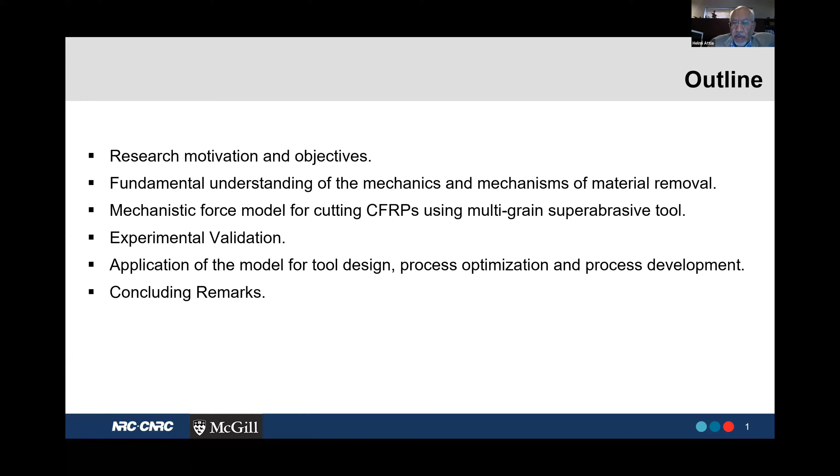As you know, the aerospace industry is quite an important sector. For example, if you look at last year or two, the contribution of that sector to the aerospace and defense industry worldwide was in the neighborhood of $760 to $800 billion a year. So it's quite significant.

When you look at the use of composite materials in aerospace, it's growing very steadily. At the moment, if you look at some of the aerospace structures by Boeing or Airbus, for example, you find that the percentage of using composite material is almost around 50% or more.

The drilling operation is very critical. Some of the structures you can have to make up to 55,000 holes in one aircraft, for example. There are some issues here.

There is the economics of the process. Also, there is the quality attributes of the product. And more important, you have to make sure that you are getting a damage-free structure.

When I talk about damage, there are many types of damage. The most critical ones are the delamination of the plies of the composite, or thermal damage. These two are the most critical ones, and they can be controlled.

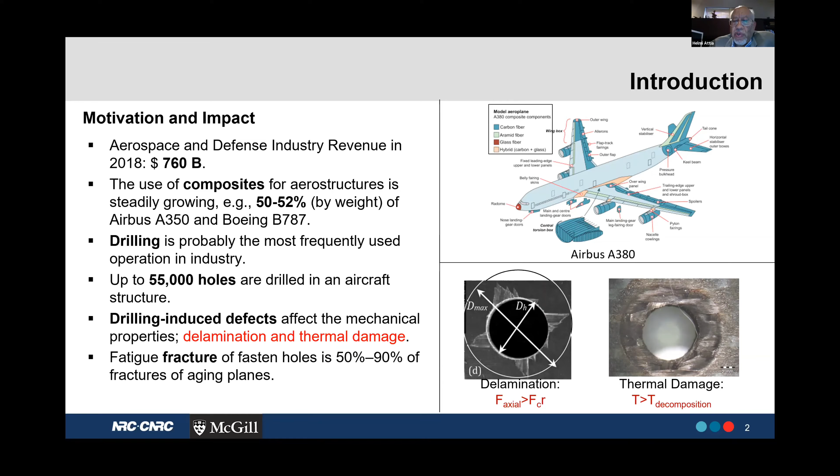So it is critical that we have to make sure that we are controlling the process. If you look at how to control the process, you can see that I have to reduce forces and reduce the temperature.

The conventional way of drilling, as you know, is that you have a tool which is advancing axially, a continuous cutting process. But the best way to reduce the forces and temperature is to make it intermittent. That means using some kind of vibration-assisted drilling or orbital motion, so that the tool and workpiece are not cutting continuously.

By imposing these two types of movement, you can eliminate the dwell at the center. Like in conventional drilling, the center of the drill is at zero velocity, and that increases the forces. So by imposing some kind of velocity vector at the center through vibration-assisted drilling or orbital drilling, you are reducing the forces this way.

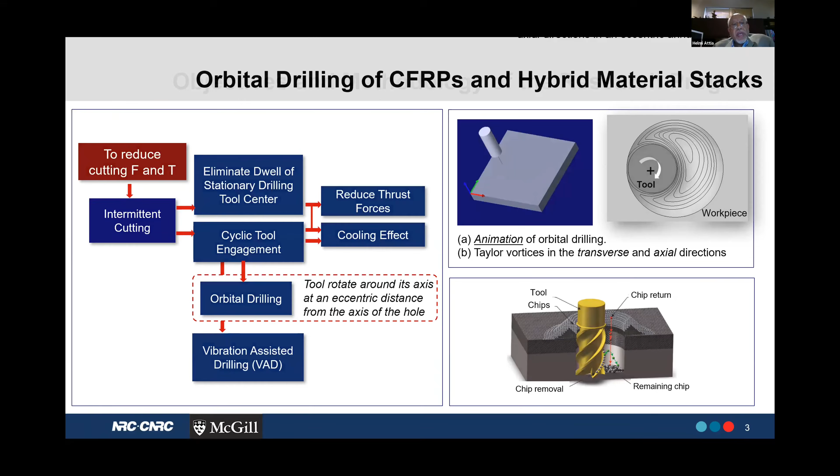The objectives of this work is, as I mentioned before, first to have fundamental understanding of how superabrasive tools can cut into composite material. My focus here is on the carbon fibers in particular, but the model applies to any other fibers.

Fundamental understanding means I have to understand the effect of the orientation of the fiber relative to the direction of motion, and the effect of the grain orientation, because that will affect the mechanism of cutting. Once I know that, I can identify the failure modes, so when I'm doing the modeling for forces, I understand which mode of failure is causing the cutting, making my predictions more accurate.

To achieve that fundamental understanding, we did some kind of scratch test using a single grain, but we also needed finite element modeling in order to understand the mechanics of the cutting.

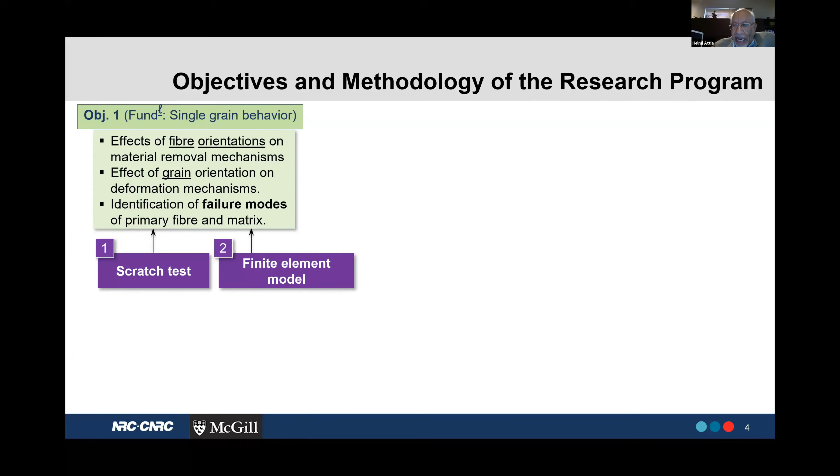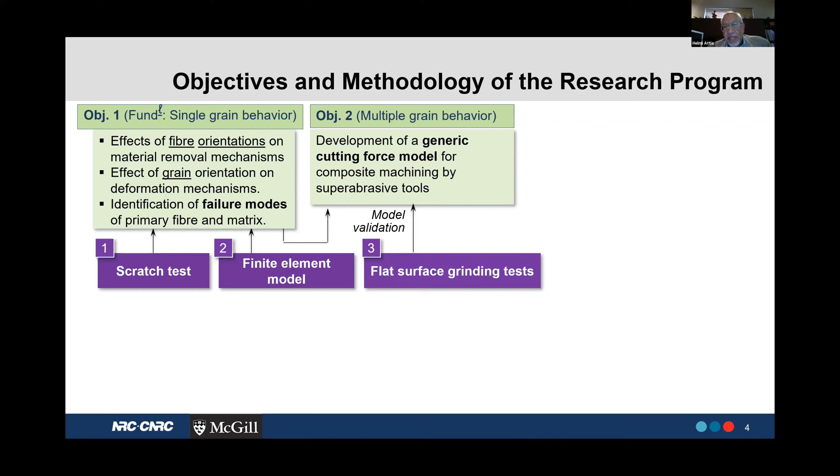The second objective is to extend this knowledge about single grain into multiple grain, which creates the model I'm looking for. I can test or validate that with some kind of flat grinding test.

Once I'm confident in the model for that, I can move into orbital drilling. I need to do some tests to understand the features and characteristics of orbital drilling to make sure I include that in my model. This test will also be critical to achieve the fourth objective: validating the final goal of having an orbital drilling model.

Once I have the model, I can use it in many aspects. I can optimize the process itself because now I know how to predict forces, and once I know the forces, I know the energy, so I can eliminate delamination and thermal damage.

Besides optimizing the process, I can also optimize the tool geometry. That's a critical issue because most of the industry relies on knowledge coming from metal cutting to design tools, which is not the same at all. One is based on plastic deformation, the other is based on fracture.

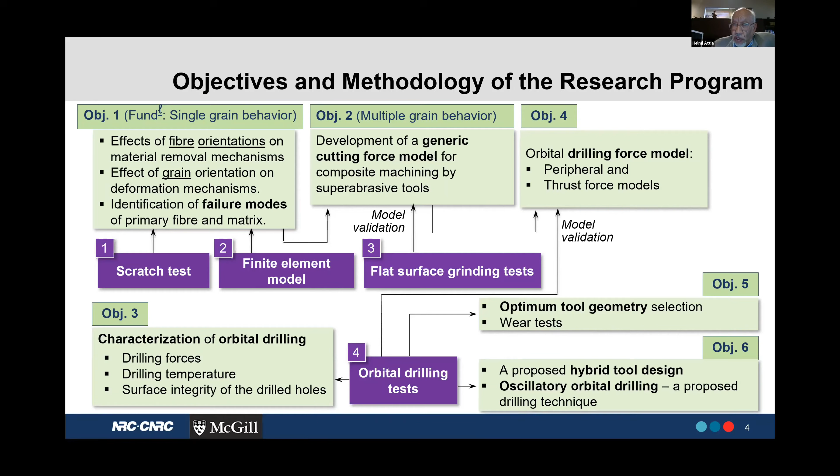This theory or model will help us optimize tool geometry, and I'm going to show some results. At the end, we could also develop new processes, which we have done recently, proposing a hybrid tool that has superabrasive and single cutting edge together, and also oscillatory orbital drilling, which we presented at CIRP a couple of years ago.

For the fundamental understanding, we are using a single diamond tool, which is used for dressing and grinding, to look at what will happen if I'm cutting the fiber or composite material under different conditions, which are stated in that table.

We also needed to have finite element modeling. We are assuming some assumptions, like plane stress. The element size should be very small to deal with the dimensions of the fibers, so the element size is in the 2-3 micron range.

We had to separately model the fibers, the matrix (the polymer), and the substrate, which is the EHM section of the process. We also have to consider the cohesive interaction between the fiber and the polymer, because that's one of the modes of failure.

Some other assumptions also have to be made, like the coefficient of friction and so on. The important part after that is finding a way to predict when the damage will initiate and evolve, because once I know that, I can model my process of cutting, knowing how it will be failing.

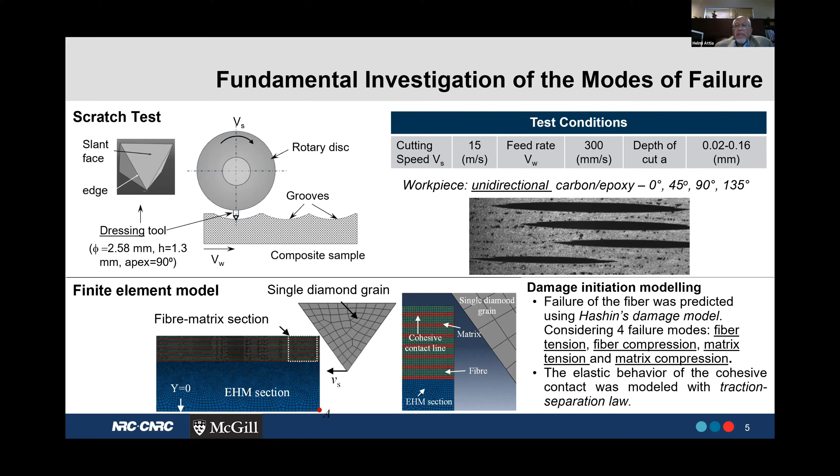What we did is look at what happens when the direction of motion is parallel, or zero angle, between the direction of motion and the fiber orientation, using that simple test. From the analysis, as expected, we have stresses in the longitudinal and transverse directions. This is L for longitudinal, and it's compressive stress, and we also have compressive stress in the transverse direction, perpendicular to the fiber axis.

Because of the low interfacial strength between the fiber and the matrix or polymer, we'd expect some kind of debonding to easily happen. As a result, the loading from these stresses causes bending. Here are some results we saw after doing the single test. We can see right away that we have a bending failure mode, but also lateral fracture in the compression transverse direction. So at zero orientation, or zero relative angle between the fiber and the direction of motion, this is the mode of failure we expect.

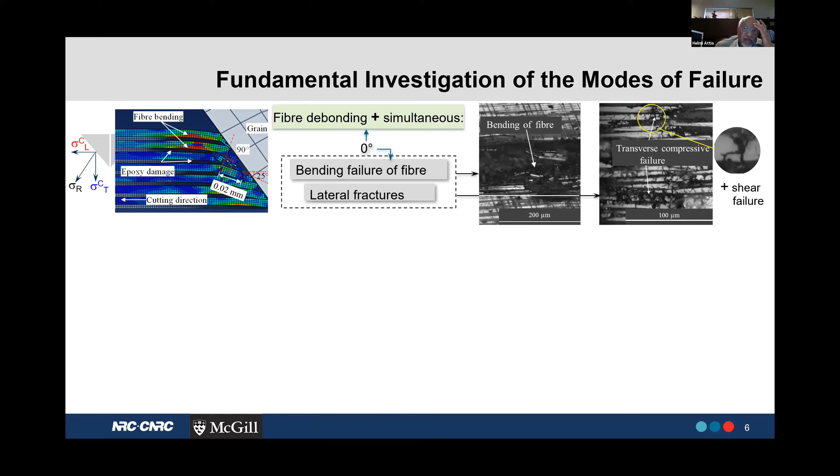We repeated the same test for different angles, like 45 degrees. Again we saw that the compressive or longitudinal compressive stresses coming from the cutting, through the Poisson effect, create stresses in the tangential or tension direction, transverse and perpendicular to the fiber. These stresses cause transverse tensile fracture, as you can see here, where the fracture is across the fiber itself.

We went to other angles, like 90 degrees. So we have 0, 45, 90, and 135, or minus 45, which is 135. We noticed the stresses are similar to what we have at 45 degrees, however we didn't see the transverse fracture. That's because of the orientation, the included angle between the fiber direction and the rake face of the grain is much larger than at around 45 degrees. As such, the contact pressure at 90 degrees is very high, and that caused the change in failure mode.

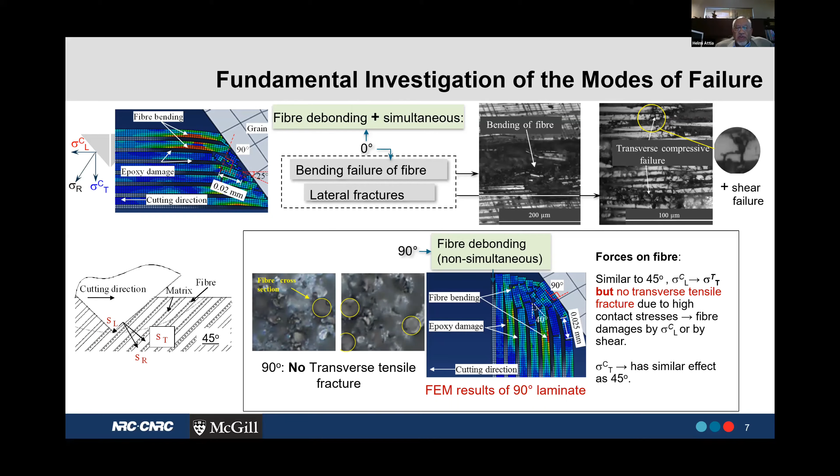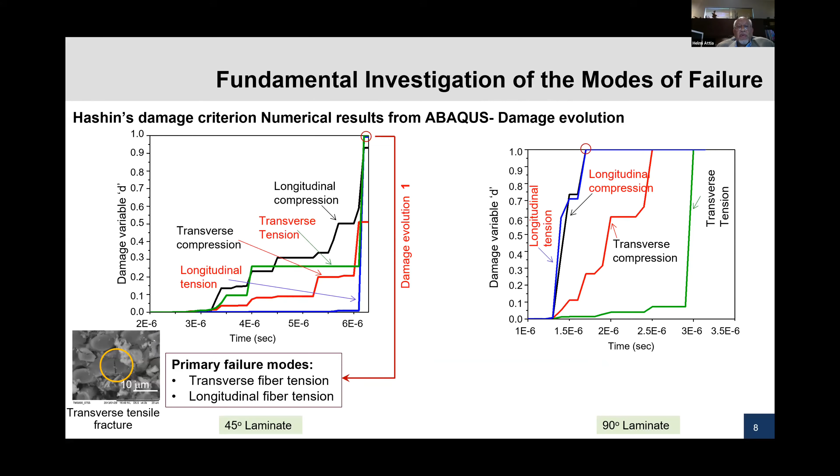There isn't enough time to cover all the details, but I'm showing the general information, for example how we use the damage criteria from Hashin's model to predict the evolution of damage. Looking at the damage variable, which we call D, it ranges between 0 and 1, where 0 means no damage and 1 means full damage. At around 45 degrees orientation, we expect to reach a damage variable of 1 when dealing with transverse fiber tension or longitudinal fiber tension, which matches what we expected from the results and the scratch test. The same applies for 90 degrees, where we see the evolution leading to different modes: longitudinal fiber tension and longitudinal fiber compression.

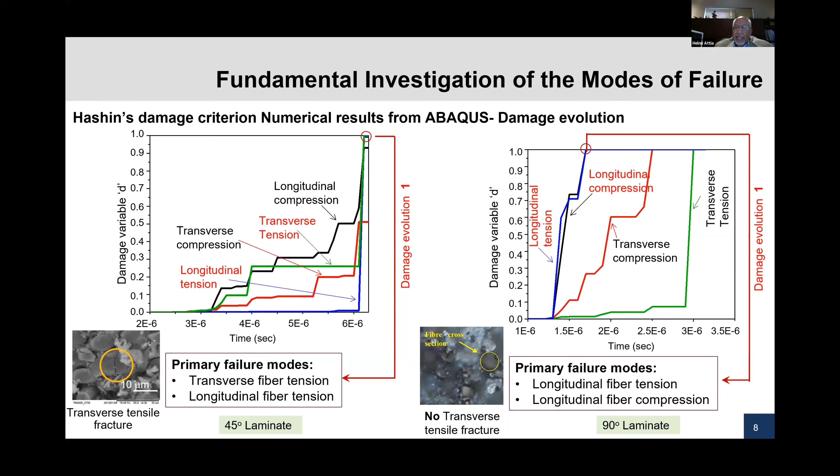So we established fundamental knowledge about the effect of fiber orientation relative to the cutting motion. Once I have this information, I can put it into my model and estimate the cutting forces. The first step in force prediction is having information about the modes of failure, which we've already established. The second is knowing the contact area between the grain and the fiber, which depends on the cutting kinematics, so I need to be familiar with that.

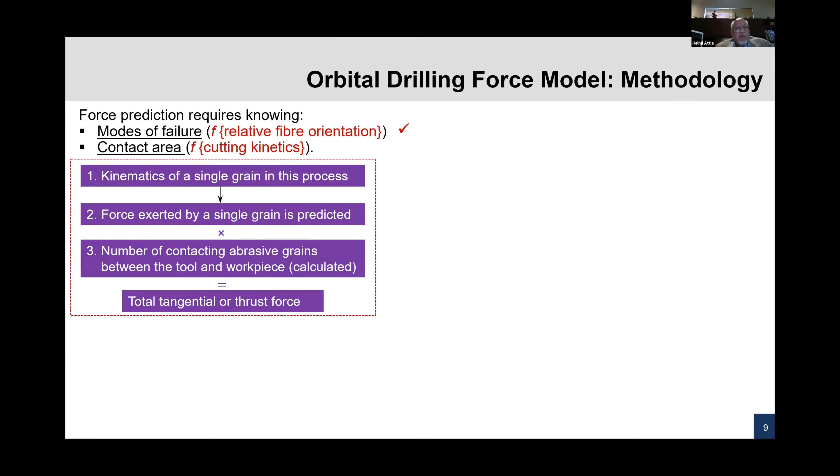The methodology, after knowing the failure modes, is to go into the kinematics of the single grain cutting. From that we can find the forces per grain, multiply them, and get the total force if we know the number of grains. This has to be idealized based on an average value, knowing the grit size of the tool. Once I know the total energy and the forces, we can get the final model. So if I start with the kinematics of the single grain, it's very close to the actual cutting or grinding process.

The arc of the cutting we can divide into 2 zones, and each zone will be divided later on in the final model into 3 regions. In this case, we can include the effect of the orientation 0, 45, and so on, approximating that for each region.

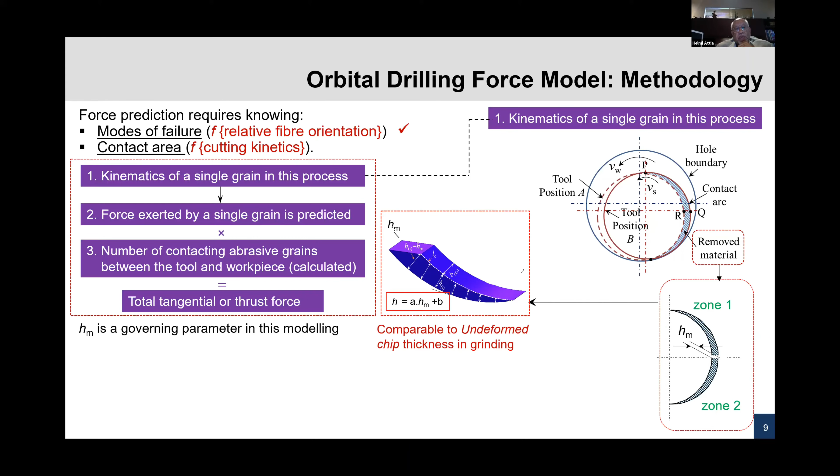Once I am familiar with the shape of the undeformed chip, the thickness is varying from 0 at the entrance till a maximum value, let us call it HM. This is a very fundamental parameter which we can see coming in all the formulation. That maximum undeformed chip thickness is a function of a number of parameters.

One of them is the number of grains per unit area, let's call it C. The ratio r, the chip width to height ratio, which we can find from the scratch test - in our test the average value was around 3.2, so we can use this value. HM, or the thickness, also depends on the workpiece feed rate, the cutting speed, as well as the depth of cut and the equivalent wheel diameter. Knowing this information, I can estimate the value of the undeformed chip thickness.

As I mentioned before, it varies from 0 up to the maximum value linearly - we have assumed it to be linearly changing. That's important to consider, because as we'll see later, it affects the force predictions.

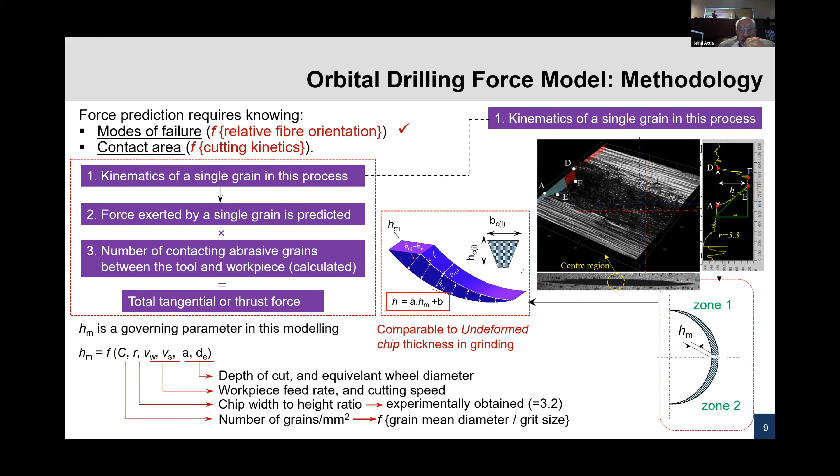Now the question is, we need to predict the forces for a single grain. If you look at the process, we have 3 components that add up into the total force: one coming from the plowing force, friction force, and also chip formation force. Once I calculate each one, I should be able to sum them for a single grain and then integrate that into the total force.

I think everybody familiar with machining or metal cutting knows that when the depth of cut is very small, you don't cut - in fact you are displacing the material, causing it to, it's like a plowing effect. That will result in pushing the fibers on both sides.

Pushing the fibers on both sides of the grain in normal direction to that fiber, and the energy required to cause fracture of the fiber is what I'm looking for, to realize the conditions that result in failure and fracture of the fiber. That comes from the plowing force itself. So the deformation energy, if I equate it with the fracture energy, I can estimate the strain that is reaching a certain level and causing the fracture.

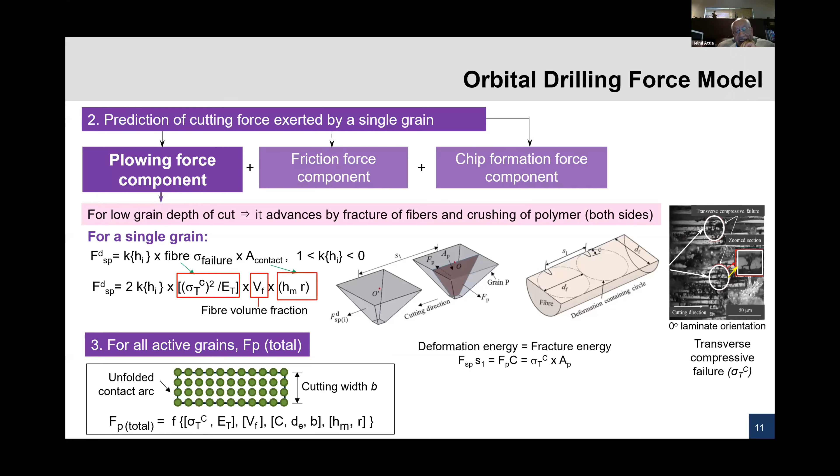By doing the proper summation, I can find the total force coming from the plowing action, again a function of the same parameters mentioned above. But here I have to consider the width of the cutting area in contact between the tool and the material, and also the length of the contact arc. Once I know this information, knowing the grit size, I can estimate the total number of contact points or grains in contact with the material, and from that I can find the total ground force.

I should repeat the same thing now for the friction force. If you look at this triangular shape here, it represents one grain interacting with the fiber in the composite material. I have stresses in the normal direction of the fiber orientation and parallel along the axis of the fiber. And this is my fiber.

Through very lengthy analysis, we know that, as mentioned before, some debonding is happening along the fiber, but we also have bonded fibers underneath the rake, in the substrate or the area below the cutting region. I have to add these two components to calculate the total friction force.

So I have to consider the parameters coming from the matrix yield stress, that's when I'm compressing the material below the rake. I have to consider the interfacial strength, that's what is causing the debonding. And of course, very critical for us is the angle between the fiber and the feed or motion direction.

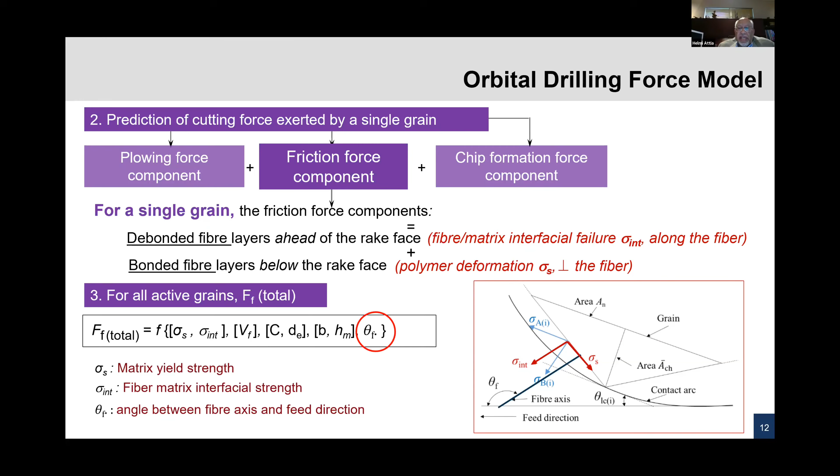So that will end up with some kind of formula. I'm showing all my formulas in functional form just to show the effect - we're not talking about the exact equation here. The frictional force will be a function of the interfacial strength, the yield stress of the matrix, the volumetric fraction of the fiber, the equivalent diameter, and so on. More critical for us is the effect of the relative orientation of the fiber relative to the motion - this is very critical in our calculations.

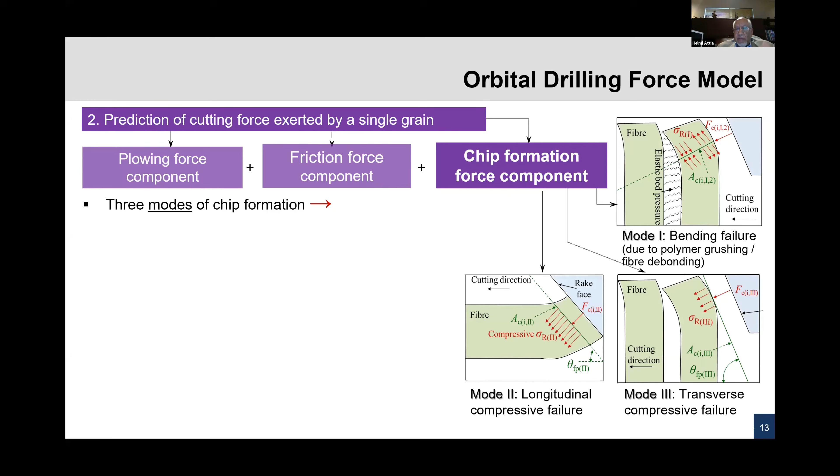Then comes the chip formation force, the third component. This one deals with three different modes: Mode 1 for bending, Mode 2 for longitudinal compressive failure, and Mode 3 for transverse compressive failure. Again, this is the initial discussion we had with Finite Element and Scratch tests that gives us this information to build on.

Once we have the bending, and we also have the debonding happening, that will cause the bending, which means the longitudinal compressive and tensile forces or stresses are acting at the same time because of the bending action.

From that, I can find information about the total force coming from chip formation, which is mainly a function of the fiber volume fraction, the stress generated - which is compressive, coming from the longitudinal and transverse directions - and of course the chip formation area, which is a function of the orientation. So that's this parameter again.

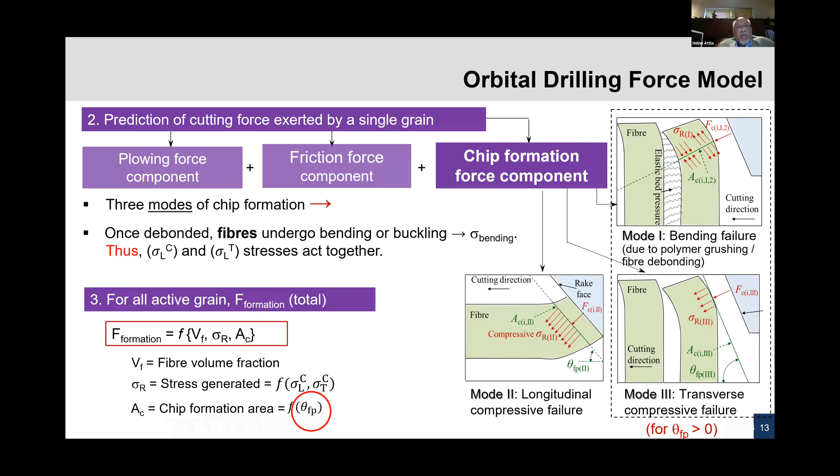So once we have these three components, we add them up, but we have to validate our work. So we first did some flat surface grinding - a very simple experimental setup. And from that, we looked at our predictions from the model versus the experimental results.

You can see here it's in very good agreement, considering that we are dealing with two different types of grains, for 120 grit and 60 grit - one is electroplated, the other one is brazed grains. So this gives us good confidence that the model is working very well.

We did also lots of validation for different orientations - 0, 45, 90 - for different conditions and so on. What we found, well I'm showing only one example, but with 95% confidence our predictions are within plus or minus 5%, which is much more than what we need for this kind of modeling, for this complex process, in order to allow us to design the process and optimize it, and the design tool.

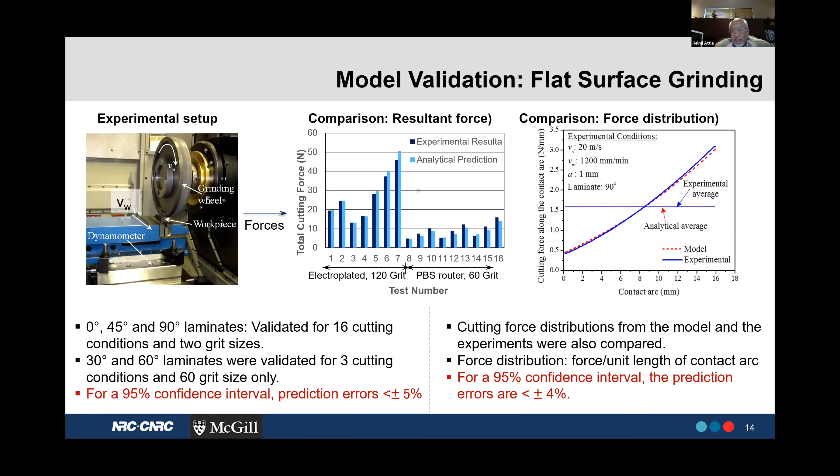We also did some comparison for the distribution of force on the arc. Again, you can see from the graph the correspondence or agreement is really in very good shape, and the error in these predictions for many tests were within 4-5%. The next step was we need to do orbital drilling to validate our model.

When we started doing the first kind of test, we realized that because of the small grains of the abrasive material, clogging of the tool can take place, meaning the debris coming out of the process can fill the intergrain space. That requires additional force, which we didn't account for at the beginning, in order to squeeze the debris generated, because now there is no room for it to go through the intergrain space.

We estimated that by treating the debris as isotropic material, we found the additional force coming from an elastic analysis, knowing the stress times the area. The stress comes from knowing the moduli of elasticity, the bulk modulus, which is a function of the transverse moduli of elasticity of the fiber, and some other parameters.

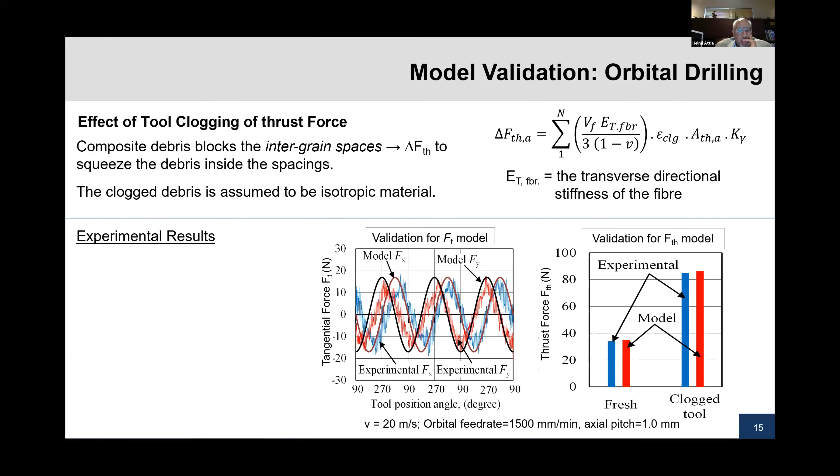Then we looked again at validation, now with the model after modifying it for the clogging effect. Here I'm showing some of the validation results.

As you can see in the results for the prediction of the tangential or thrust force, for example, the predictions are quite very good. In fact, you can see that — again, I'm just showing one case.

We also looked at the fresh tool versus the clogged tool based on the model I just mentioned, and again the agreement was quite good.

With a 95% confidence interval, we found that our predictions for the tangential force are within 1 to 14%, and for the thrust force around 3 to minus 8%. Again, this is very acceptable, considering the effect of the continuous change of fiber orientation relative to the grain as it moves undercutting.

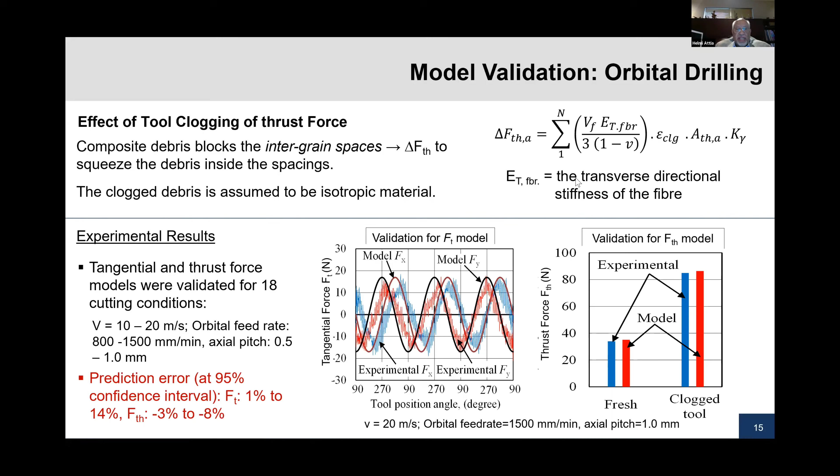How do we apply that model? The superabrasive tool is very good because it makes the tool life very high, but it has a serious problem: the surface roughness is very poor. That's the main challenge, so we had to find ways of going around that.

One approach is to design a hybrid tool. The first portion is the abrasive section, and we looked at different designs, like ball-ended or flat part at the end of the tool. Then once we do the process of cutting with superabrasive, we can repeat another run with some kind of PCD insert — polycrystalline diamond single tool — in order to improve the surface finish.

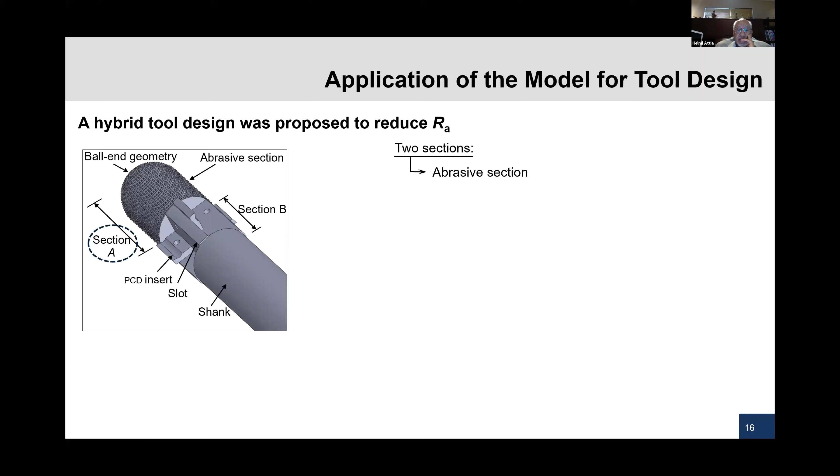When we did that, we had the two sections, and we looked at the optimal design. The model was used to optimize the design of that section in terms of the grit size, the shape of the end, whether flat or ball-ended, and so on. We made sure that the forces are below a certain theoretical value, so using this model we were able to ensure there is no delamination, no thermal damage, and we achieved hole accuracy per the standards of the aerospace industry.

Here I'm showing that if I deal with the superabrasive portion only, the surface roughness is very poor — around 9 or 10 microns, talking about Ra, center line average. However, once I have the second cut with the PCD insert, the roughness dropped from 10 to 2. That's the objective of this design, and it worked very well.

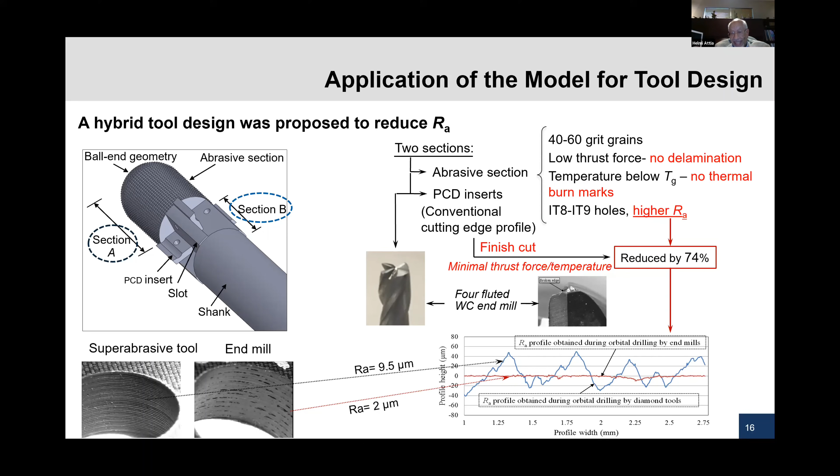Then we thought about another approach. In this approach, we are using only the superabrasive tool — we don't need PCD, which is expensive — and we do the process in 2 stages.

The first stage is to use conventional orbital drilling. Then, once we drill the hole, we do some kind of oscillatory motion while performing another orbital motion. This work was published in CIRP a couple of years ago, so it's detailed there.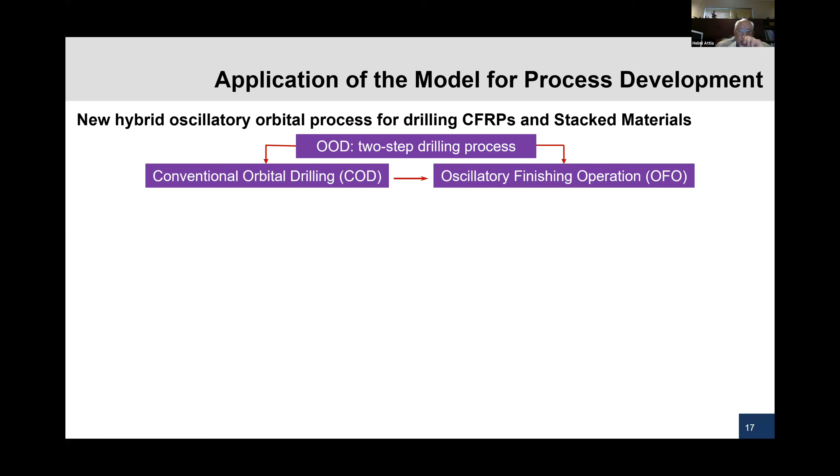In the first step, which is conventional, we use a certain spindle speed, like say 40,000 RPM, a certain orbital rotational speed, and axial feed. In the second stage, where we are oscillating the same tool, we use the same rotational speed, but the orbital rotational speed is much lower — an order of magnitude smaller — while the axial feed rate is an order of magnitude higher.

By doing that, conceptually, one can see the intersection between the workpiece and the tool through the oscillation. I'm dealing with different profiles of the tool, and gradually you can see what's happening in terms of reducing the roughness from the original shape to the final shape.

This is a good example to show how the roughness was dropping. In this particular case, under these conditions, the roughness could go up to 17 microns RA. We dropped that to between 1 and 3. So that was a very successful process indeed.

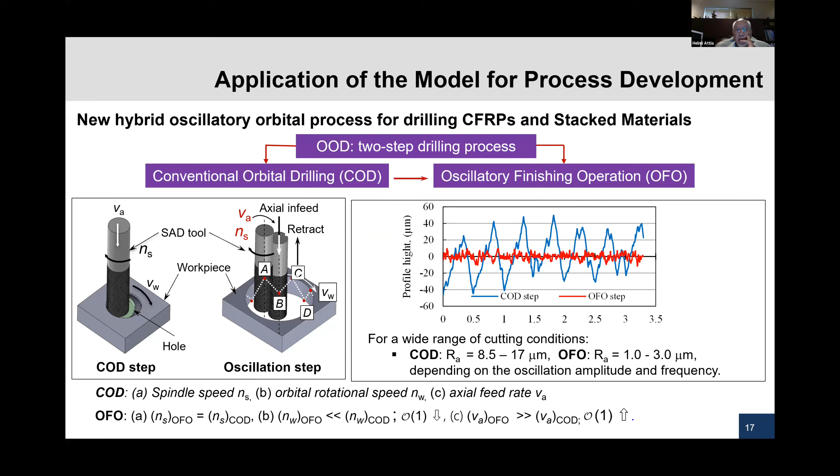To put everything in the right perspective and compare: conventional drilling using tungsten carbide tool, which is the norm of the industry, versus conventional drilling using PCD tools, versus what we are proposing in terms of orbital drilling with superabrasive diamonds, or oscillatory orbital drilling with SAD tool. If you look at the relative cost, of course the tungsten carbide is the cheapest.

If this is my reference point, you will see that although the PCD is more expensive, the number of holes produced is very high. I'll give an example from some tests: I can get only 7 holes out of this tool, while I can get something like 300 out of this tool, and maybe 200 out of the superabrasive tool.

So if I look at the cost per hole, you can see that what we are proposing is actually much more cost effective than using PCD. If this is dropped from 1 to 10%, the cost per hole here is only 6% of the reference case.

In terms of production time, if I consider conventional drilling as relatively 1, we'll see that the time required to drill one hole is the same, but it's doubled with orbital drilling because the motion is more complicated and that takes time.

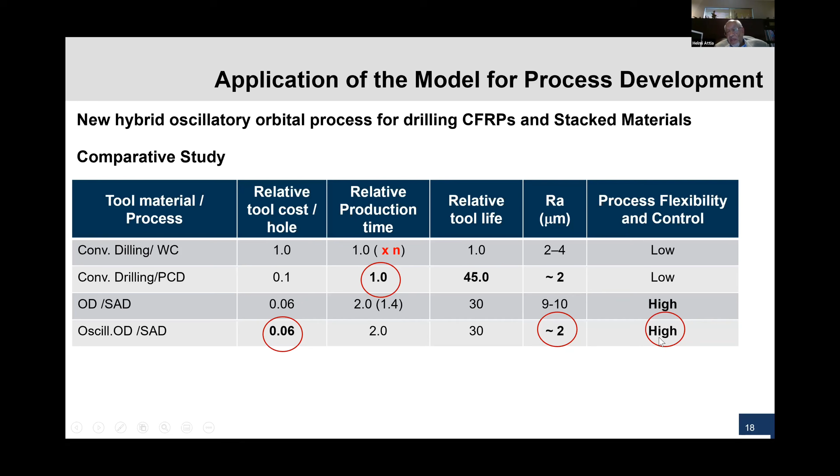To conclude, just to be on time: I presented a fundamental understanding of the mechanism and mechanics of cutting and material removal using the simple single grain experiment and finite element modeling to predict damage evolution.

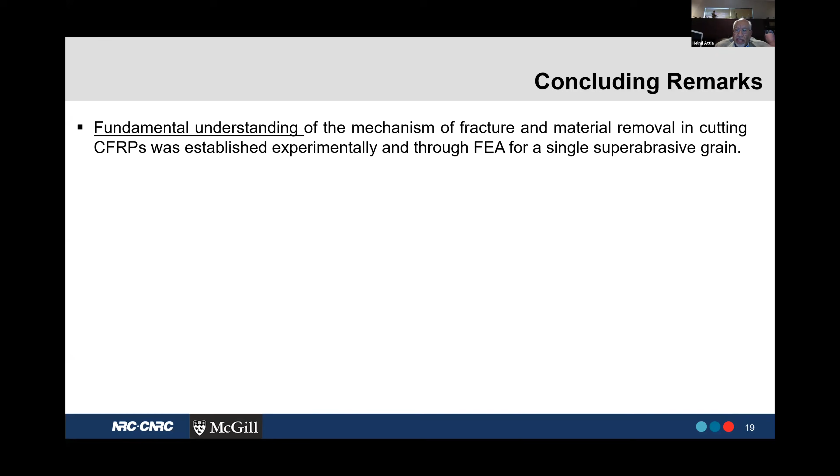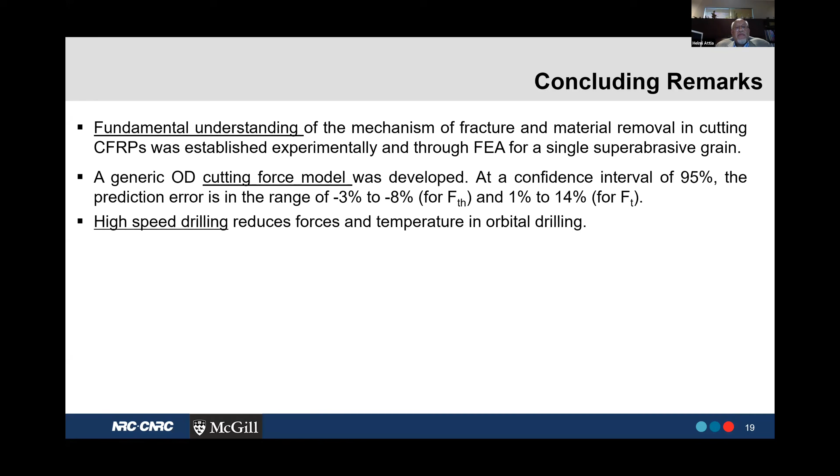We also developed a generic cutting force model which, with high confidence level, achieves accuracy within 8 to 14%. For high-speed drilling, we can reduce the forces and temperature in orbital drilling, improving productivity. We used that model for optimization of the tool and developing new tools, and also to develop new processes where we have the oscillatory movement, and again we're able to reduce...